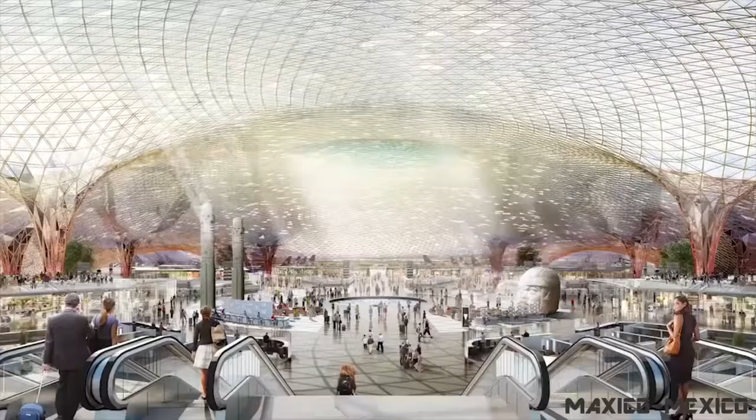Imagine winning a competition to build a new airport in Mexico City, with a design that is quite literally out of this world. A single terminal, a showcase of Mexican innovation, a government vision to transform the landscape and the economy. It can only be built with cutting-edge technology.

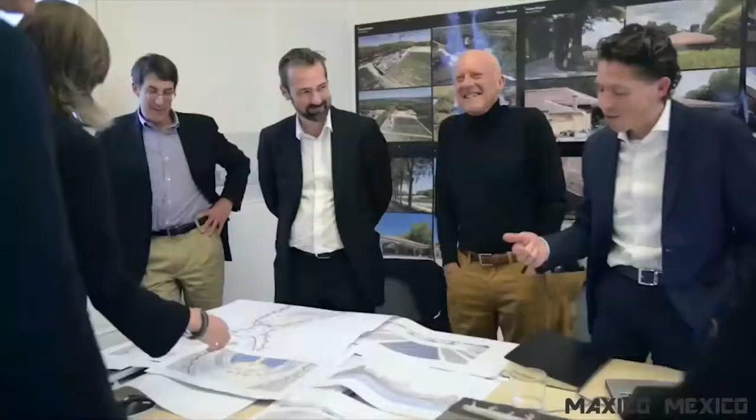To make it happen, you need the very best people. 200 of them, from around the world. Architects, engineers, planners, programmers, modelers, visionaries. We're interdependent. We're about 140 different disciplines, and we work as one team. This airport should be the opportunity to celebrate Mexico as a destination. And we are very confident that we have the best team in the world to develop this project together.

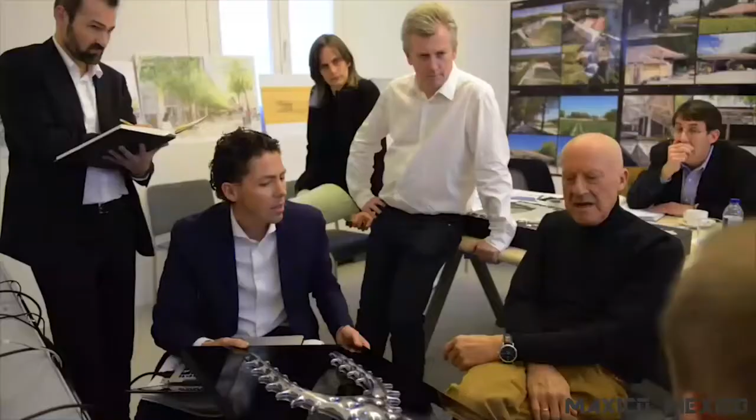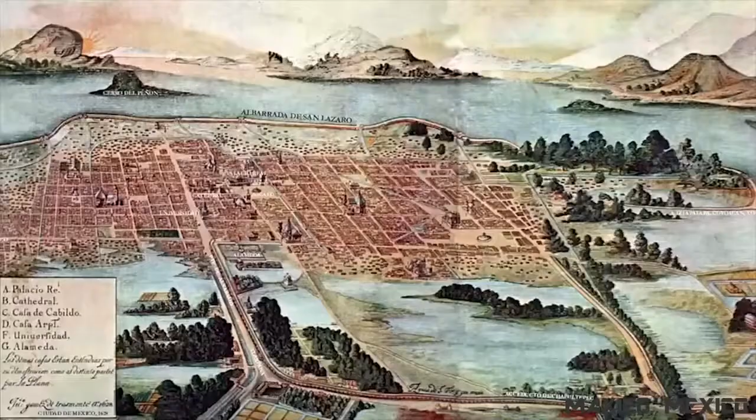But even with the best team in the world, building this airport is not going to be easy. I think there are some incredible challenges on the project. The scale is one thing. The site is really, really complicated. It's on a drained lake, which means it's a very soft soil underneath. It's a seismic area. We learned there's also a volcano nearby, so I don't know what else they could possibly throw at us, but there is quite a long list of challenges to getting this right.

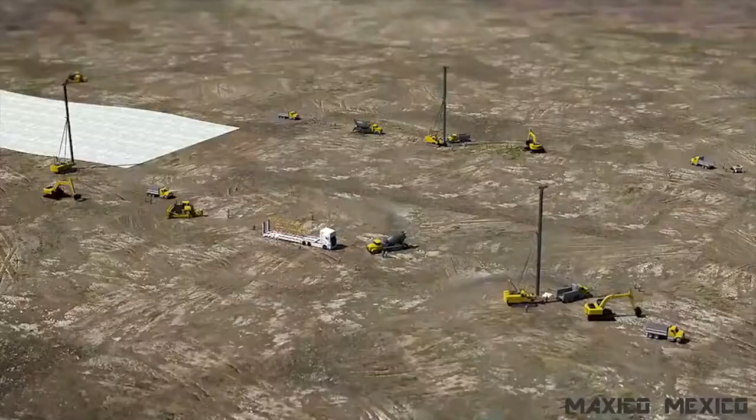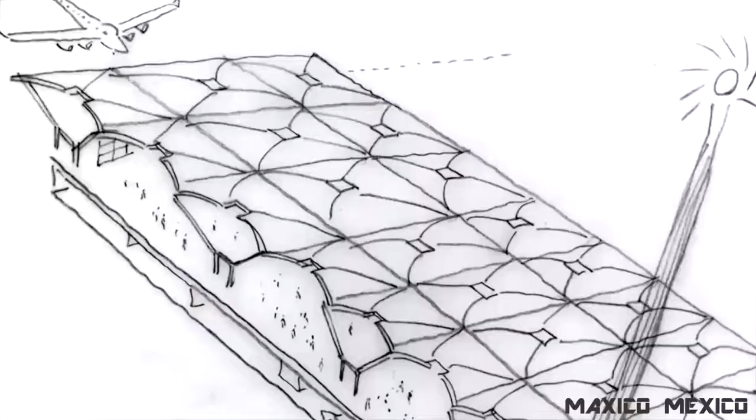Construction starts in 2016 and must be completed by 2020. A tough order, but this team knows airports inside out. Stansted was a radical departure. We literally turned the conventional terminal upside down, brought in natural light, and created a space that was welcoming and that was about the romance of flight. In Hong Kong, we razed an island, chopped it down, created a site the size of Heathrow. At the time, the biggest airport in the world.

Beijing, like Hong Kong, was developing the model of Stansted, the reinvention of the airport. The biggest airport in the world, but also the friendliest. All under one roof, a roof so immense, rather like an artificial sky. For Mexico, what is the next step? What would revolutionize airport design?

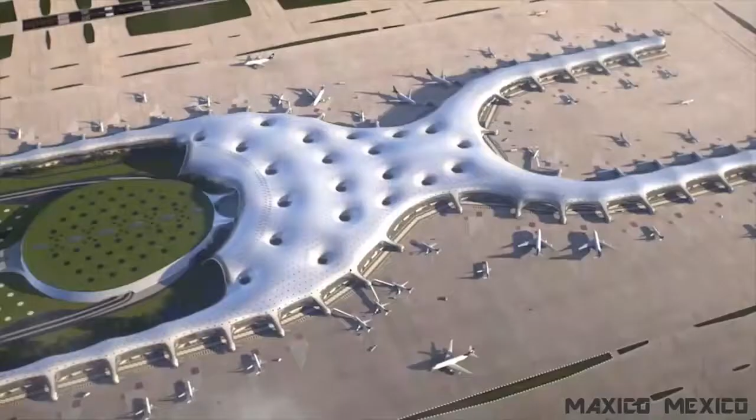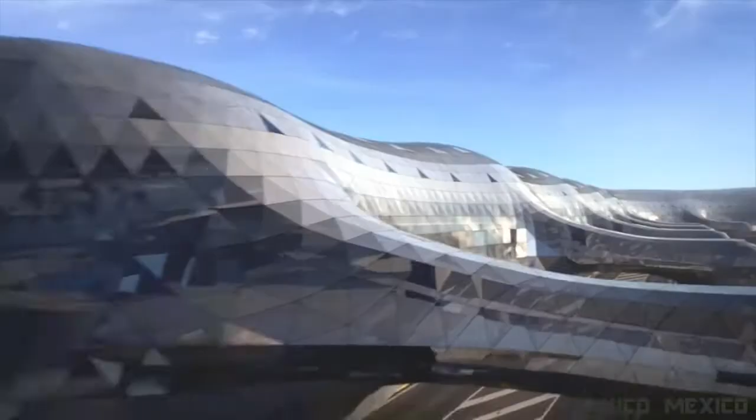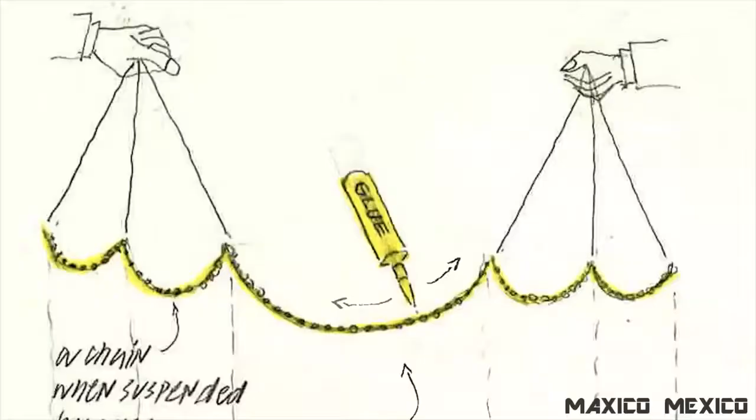What if you could have one component that could unify all these various elements, take out the columns, the 36-meter span goes to 170 at its greatest. What if this could do everything in a way, as a flowing geometry, letting in the light, and a kind of sinuous sculptural form in the landscape? To turn what if into a reality, the team has used the concept of a hanging chain turned upside down to create the geometry of the roof.

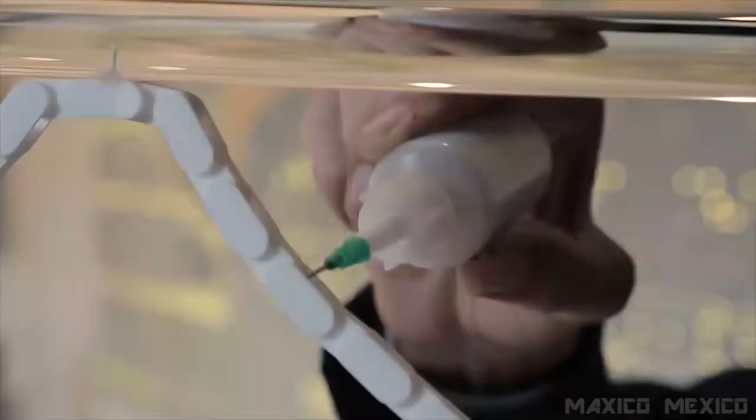This floppy chain, when suspended, forms in its shape the perfect tension structure. If we then made this rigid by applying a high-performance glue along the length of that, so that it then becomes rigid, and we turn that upside down, we end up with the perfect compression structure. Computer power makes something that is immensely complicated look effortless.

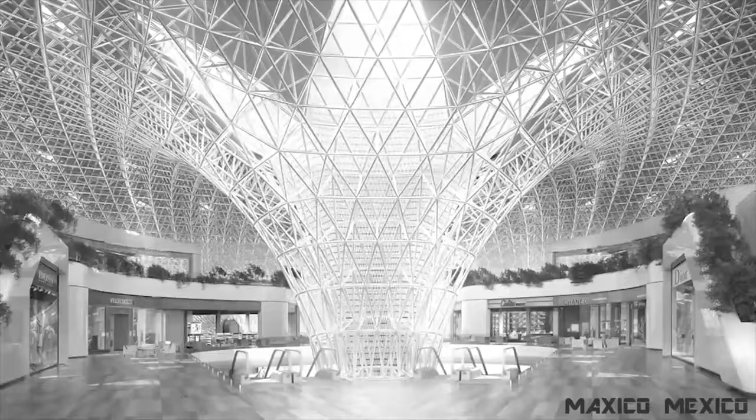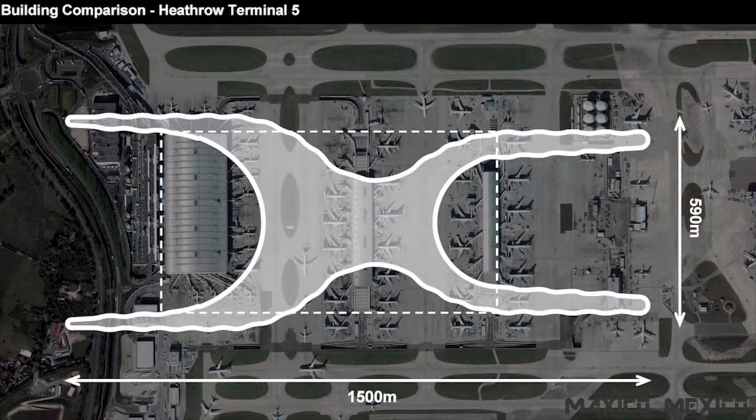The roof is supported by funnel-shaped columns, and by virtue of their shape, they create a smooth distribution of forces between the columns and the roof. They essentially become one thing. There are 21 funnels, and each one is the size of the British Museum roof. This building is 1,500 metres long, and throughout, the architects and engineers are making sure the form and function are closely interwoven. The site presents a set of unique difficulties for the engineers.

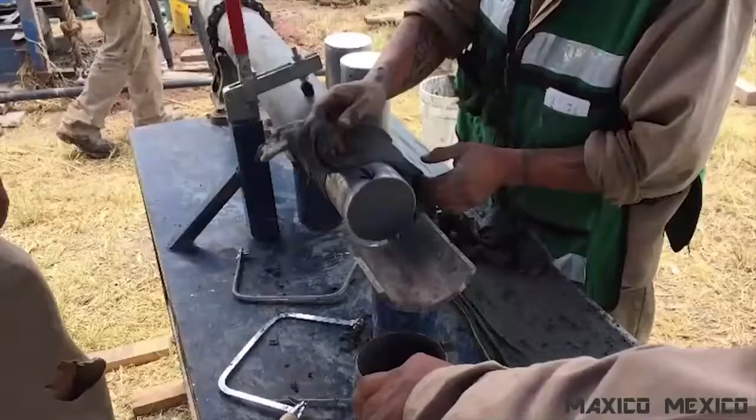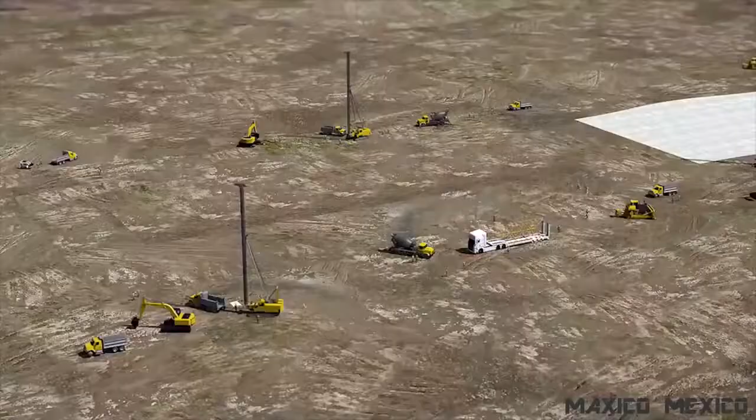When you take a sample of the soil and you dry it in an oven, you discover that there's about 7 times as much water as there is soil. So the team have built a raft to, quite literally, float the structure in wet earth. And the idea is that we're removing an amount of soil, a weight of soil, that's about equal to the weight of the building. So it almost floats there in a sense, and the soil doesn't know the difference.

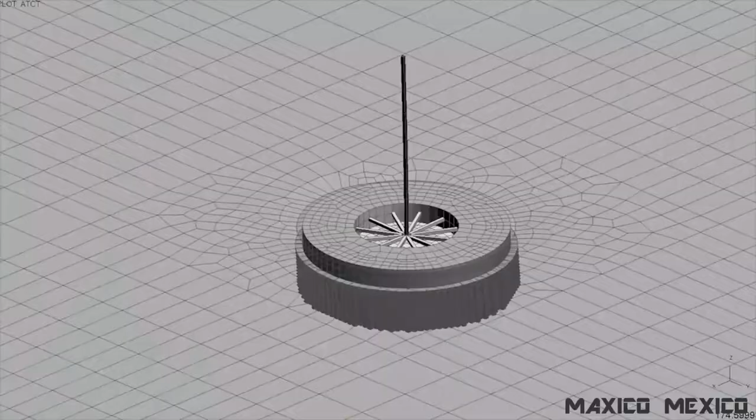Mexico City lies between 3 large tectonic plates and has a long history of destructive earthquakes. The engineers need to understand how they could affect the structure. It's rather like shaking a jelly in a bowl. The building then reacts to that shaking and then pushes force back into the soil, so there's a true soil structure interaction.

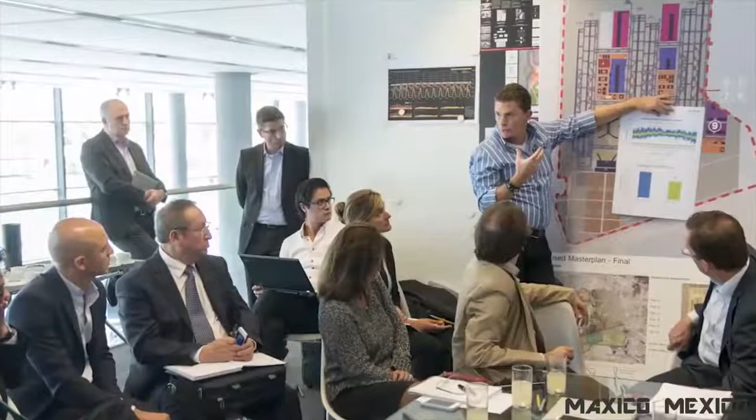Minimising impact on the environment is essential. Sustainability is key. The airport needs to earn a green building certification. The climate in Mexico City is such that for nearly half of the year we can work with the air at ambient temperature. The rest of the year, minimum heating and cooling.

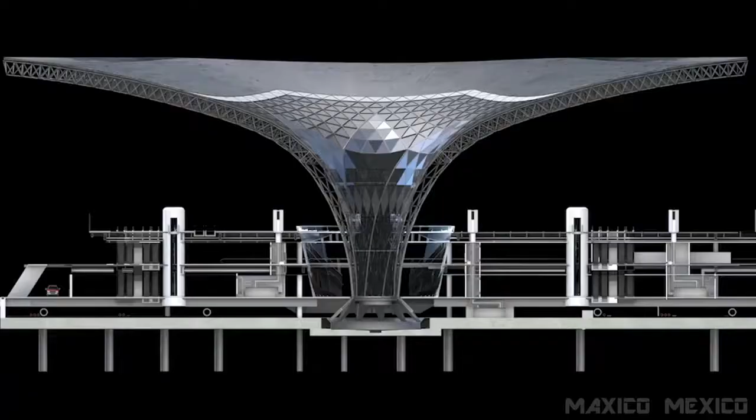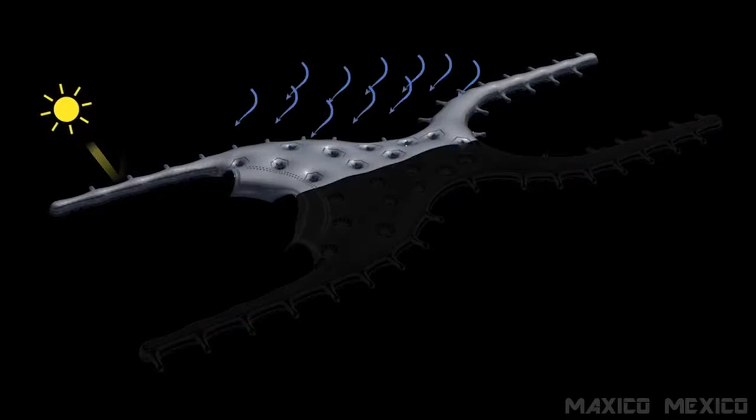A mild air displacement system, which together with all the other techniques, distributing air through pipes in slabs, insulation, harvesting energy, we've pioneered these techniques over a period of nearly 50 years, working with environmentalists, research groups, specialist engineers, to ensure that this airport will truly be the most sustainable on the planet.

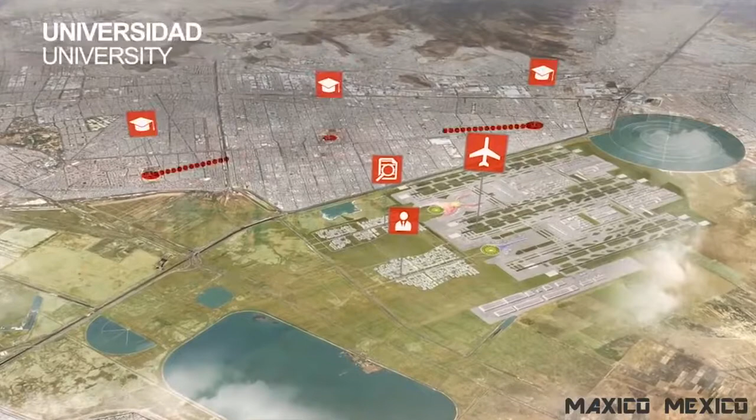True sustainable design has a triple bottom line of environmental, social and economic factors that all need to come together and overlap in some way to be truly sustainable. It's a piece of infrastructure that we all need as Mexicans. Part of the agenda of the project is how we can create more employment, develop more the local construction companies, and about how we as a country can take this opportunity to develop the environment. Mexico City Airport. Low impact on the environment, high impact on passengers.

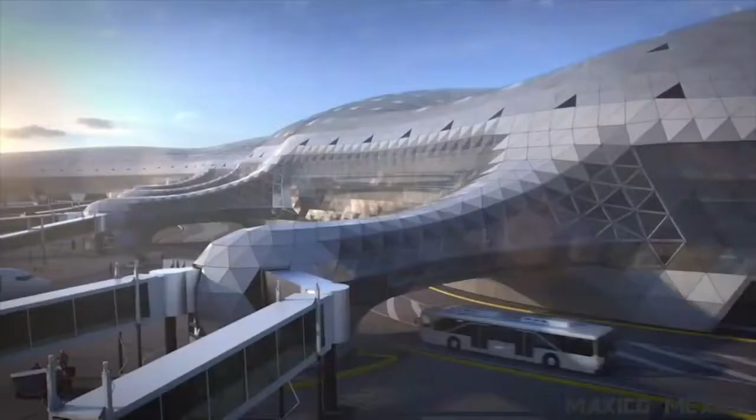You're going to come into land to Mexico City. You may capture a glimpse of the airport, which will look unique from the air. You will then step off the aeroplane onto the fixed bridge, which is the first of the elements that are part of the system of elements that we've designed. The arriving passenger steps into a world of light and drama, travelling through the building calmly and seamlessly to an onward destination. Meanwhile, for those leaving Mexico, the journey is just beginning.

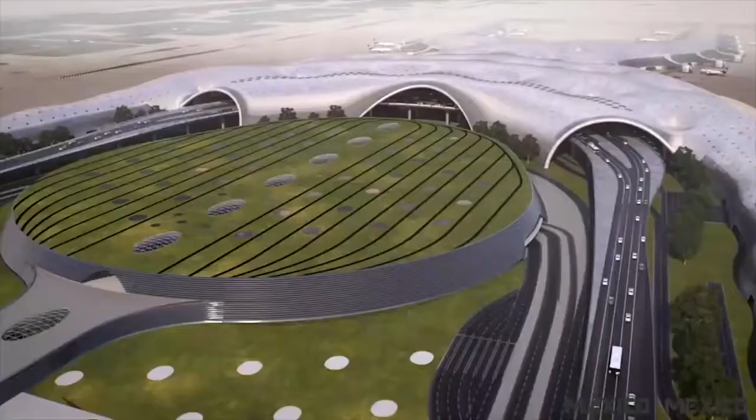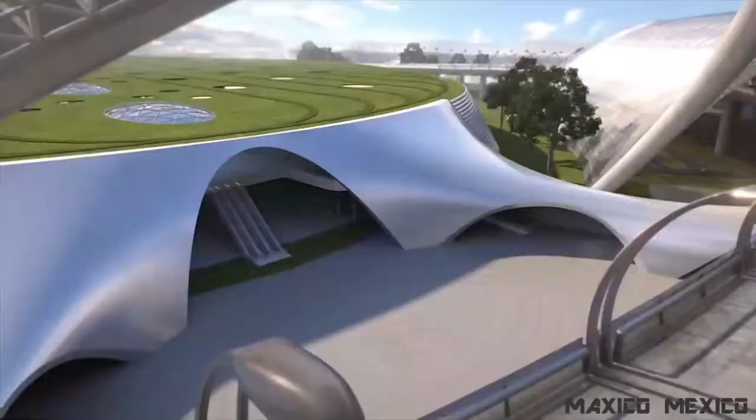The car park structure, the GTC as it's called, is the first part of the experience, and we want that to be special in itself. Imagine you've arrived under this great sweep of a roof. You move through to departure, and at this elevated level you see the incredible space, column-free, vast, filled with light, truly uplifting. As you move down the escalators into the heart of the building, that gives you the orientation to the arms which move off and take you to the aircraft.

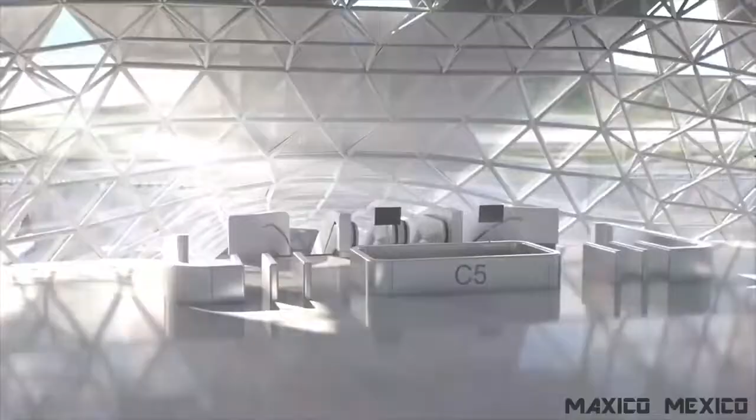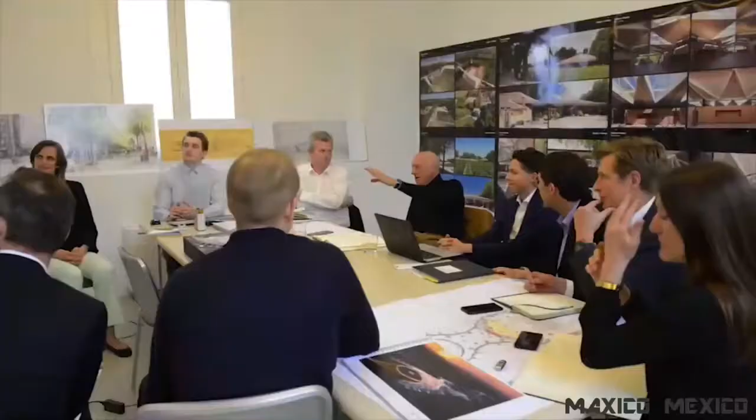This airport is about connectivity, short walking distances, convenience, minimum number of level changes, no getting on and off trains, no tunnels. It's about the celebration and the joy of space and light. Mexico City Airport. Foster & Partners, FR-EE, NACO, Arup. One vision, one design, one team.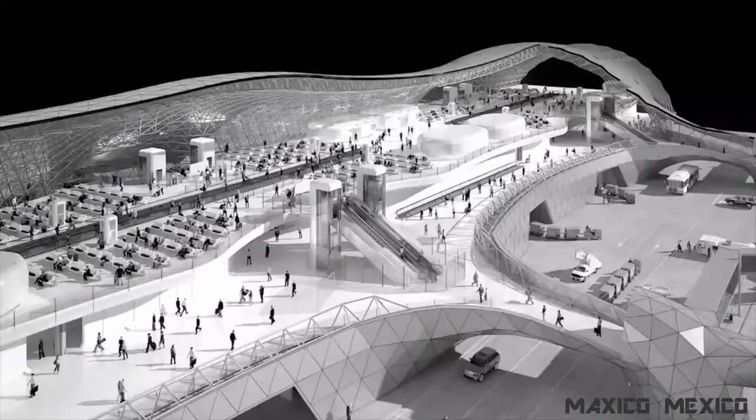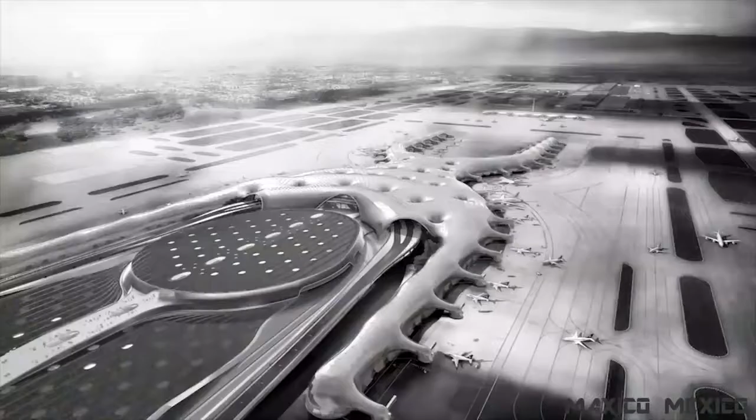We are not designing this airport for the day of the opening, but we are designing this airport for the next century in our country. This is where the edge is, and if you want to be looking for the future, you want to be on that edge. I always imagine to use that airport with my own kids and try to make my own kids see the potential of our country and the potential of architecture.

If we take a crystal ball and we look into the future, 2062, how do we know what the needs will be? All we can say is we want the most flexible enclosure that's possible, that can accommodate internal change. In summary, we've taken a holistic approach to the design of this airport. We show a model which will be an inspiration for future airports, which will be efficient, operationally flexible for the future, and above all, beautiful and a great experience.